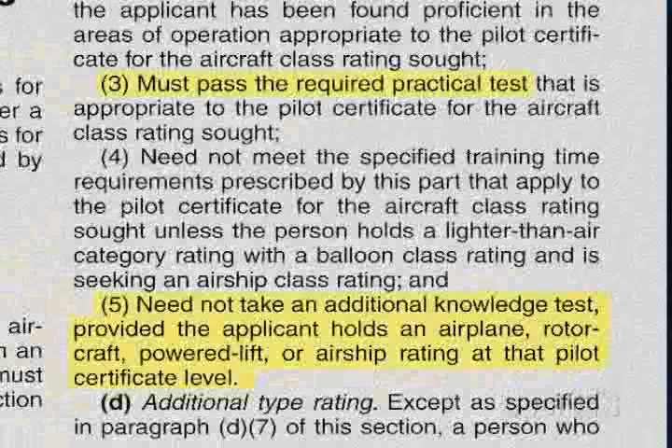The requirements for obtaining a multi-engine class rating are described in Part 61 of the Federal Aviation Regulations. If you are adding the rating at the same level as your existing single-engine pilot certificate, you must show proof of training and take a practical test. No knowledge test or minimum flight times are required, provided that you already hold an airplane category rating. If you don't hold an airplane category rating at the certificate level for which you are applying, you and your instructor will need to spend some time with the regulations to determine the requirements.

After obtaining an unrestricted multi-engine rating, you are legally permitted to fly any multi-engine airplane that does not require a type rating. Of course, you will also need complex and high-performance endorsements in your logbook when these are required. Remember, just because it is legal doesn't mean that it is prudent.

If you obtained your multi-engine rating in an airplane having the engines positioned to the front and rear of the fuselage, your certificate will be issued with a centerline thrust limitation. Removal of this limitation requires a second practical exam in an airplane with engines positioned away from the fuselage center.

Flying a multi-engine airplane can provide redundancy for critical systems. This provides the opportunity for safer operations when something breaks. The added complexity and additional systems also mean that the chances of something failing may be greater.

One thing that you will notice in your training is that things happen more quickly in a twin. When something does fail, you have to be on top of your game to improve your chances of a safe outcome. A pilot with a bit of rust on his skills can be much more dangerous in a multi-engine airplane than in a single. This rust factor is likely one of the primary reasons why flying light twins has not historically proven itself to be safer, even though the opportunity is there.

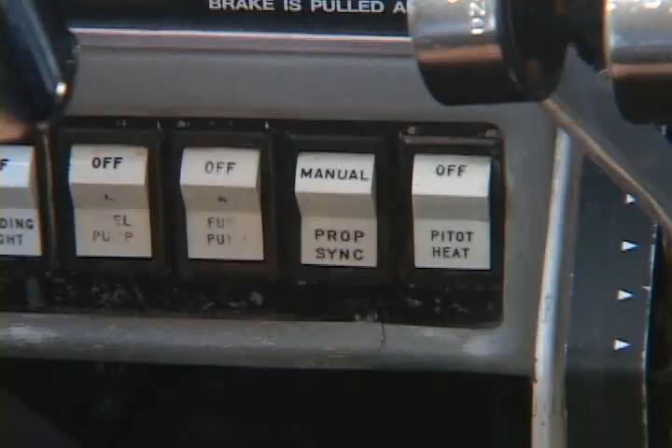This position is used when an engine fails and will be discussed in detail later in this program. Completely new systems may also be present. With two propellers spinning outside the cabin of your training aircraft, you'll want to have them rotating at the same speed. This is known as synchronizing the propellers. Syncing the props reduces their noise level and removes a pulsing sensation heard in the airplane. Your training aircraft may have a system for automatically synchronizing the propellers.

Another new system found on many light twins is a dedicated heater for the cabin. This type of heater burns gas from the tanks and provides heat through its own ductwork. This overcomes the difficulty of getting heat from the wing-mounted engines into the cabin for cold weather flying.

Take a look at the V-speeds for a multi-engine airplane, and you will see a number of familiar items. You'll also see some new speeds that you may not recognize. These speeds are related to multi-engine emergencies and operations with only one engine running. We will briefly define them here. Those important to light twins will be discussed in more detail later in the program.

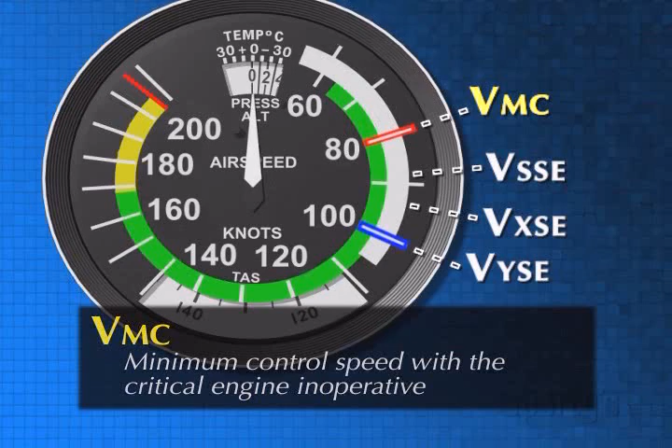VMC is defined as the minimum control speed with the critical engine inoperative. VSSE is the safe intentional one-engine inoperative speed. This is a speed that your instructor will use to keep your training safe. VYSE provides the best rate of climb speed on a single engine, while VXSE affords the best angle of climb in this condition.

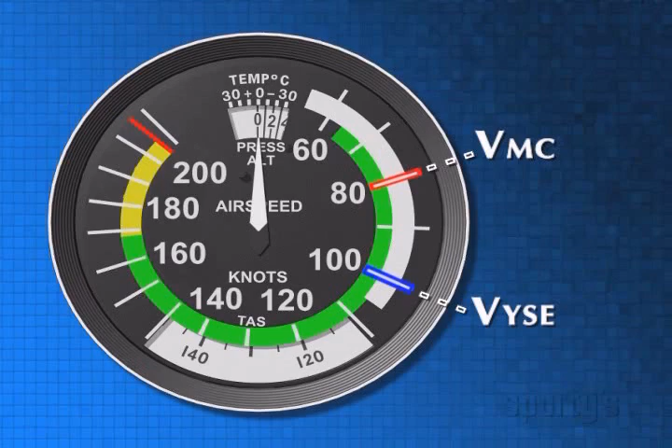Less common in light twins, but worth mentioning, are V1 and V2. V1 can be defined as the takeoff decision speed. It is the maximum speed in the takeoff at which a pilot may begin to stop the airplane and remain within the accelerate stop distance. It is also the minimum speed in the takeoff following a failure of the critical engine at which the pilot can continue the takeoff and achieve the required height above the takeoff surface within the takeoff distance.

V2 is defined as the takeoff safety speed. This is the speed that must be obtained after liftoff to meet the required engine-out climb performance. These speeds will be found in the airplane flight manual or pilot operating handbook for your airplane. If you are flying an older twin, it's possible that the manufacturer may not have published all of them.

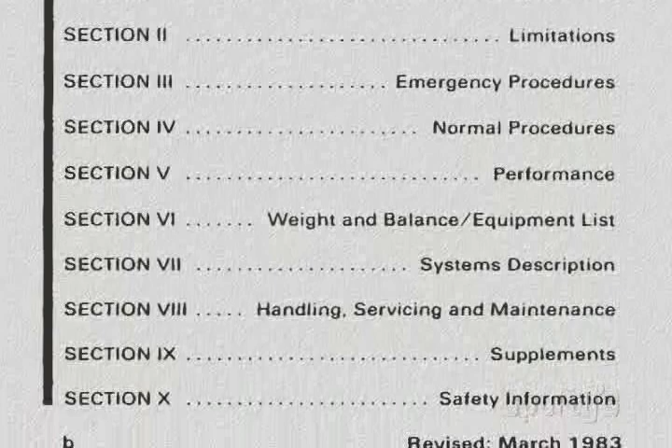The AFM or POH for your airplane will include the information that you have come to expect in an aircraft manual. It will also include a number of new performance charts which we will discuss later in the program.

The principles behind weight and balance calculations do not change with a multi-engine airplane. What does change is the number of variables. In your 4-seat single-engine trainer, your options for the carriage and placement of baggage were limited. In a typical twin, you will find more seats and more baggage compartments. You may have the choice of loading baggage into a nose compartment or a rear compartment or even into a wing locker. Each compartment will have its own limitations and affect the CG differently.

Your loading may not only be concerned with the traditional longitudinal CG, but the lateral CG as well. The manual for your airplane will provide you with the information you need to make appropriate loading decisions. Some manufacturers even include suggested loading for common scenarios. Regardless of the suggestions, the PIC is responsible for ensuring that the aircraft is loaded within acceptable limits.

This will become even more critical when we consider the effect of weight and balance on controllability and performance after an engine failure, later in the program.

You should find a checklist for the aircraft in the manual. This checklist, or a derivative created from it, will be used as we pre-flight the airplane. The inspection will be much like that for a complex single. There will, of course, be more engine and engine-related systems to check. Your instructor will point out the key items required during the pre-flight of your particular make and model of airplane.

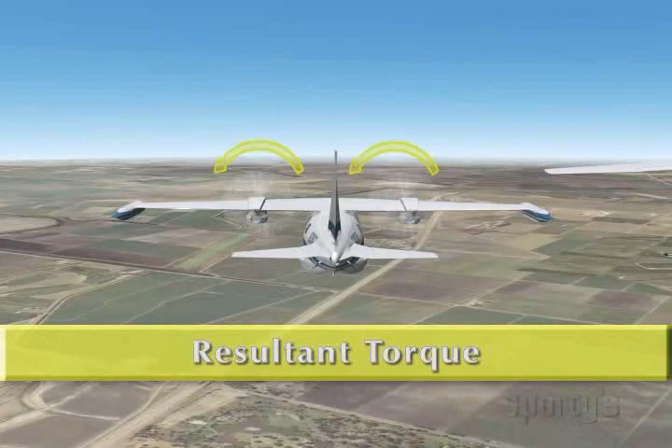Differences occur due to the position of the engines. Other airplanes have the engines turning in opposite directions from each other. These airplanes are commonly described as having counter-rotating propellers.

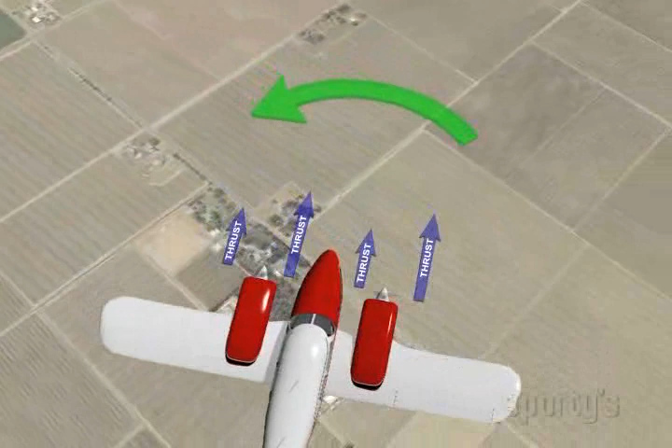When viewed from behind, the propellers on a traditional U.S.-manufactured twin both rotate clockwise. This places the descending blade on the right side of the engine. During flight at higher angles of attack, the descending blade has a higher angle of attack than the ascending blade. Because the descending blade of the right engine is further from the airplane's center of gravity than the descending blade of the left engine, a higher yawing moment is created on the right side of the airplane. This P-factor-induced moment will yaw the airplane to the left unless counteracted with rudder.

With counter-rotating propellers, the distance from the descending blade to the CG is equal on both sides. The yawing moments cancel each other out when both engines are producing the same power.

While we're speaking about aerodynamics, there are a couple of other items we should note. As you have probably surmised, a twin-engine airplane has four forces acting on it just like other airplanes. When both engines are operating, you have a comparatively large thrust vector, which is the sum of the two offset thrust vectors we have been discussing. This gives most light twins a significant climb advantage over their single-engine brethren when all is well.

A less intuitive difference in the four forces is the production of induced lift. Since the engines on most light twins are attached to the wings, there are localized areas of the wings receiving the accelerated slipstream of the propellers.

Let's get back to your first flight. After you've flown around for a bit and perhaps tried a few familiar maneuvers, you will return to the airport.

Descent planning in a multi-engine airplane requires a bit more thought than when flying a low and slow single. Cruise altitudes and speeds tend to be higher, and higher performance engines also require more TLC. Power reductions should be gradual whenever possible, and temperatures should be monitored and kept relatively stable.

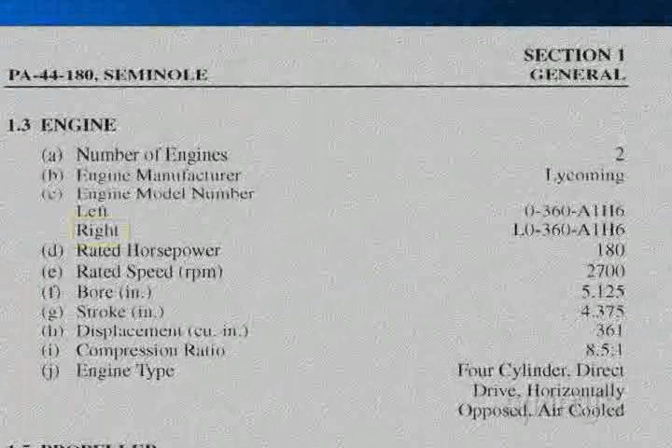The Duchess and the Seminole both have counter-rotating propellers. The O-360 engine on the right side of each airframe has its designation preceded by a letter L. This indicates a counter-clockwise or left-turning engine.

The diesel engines on the Twin Star are full authority digital engine control, or FADEC, equipped. This system controls the manifold pressure, propeller speed, and mixture through a separate engine control unit, or ECU, on each engine. As the pilot, you set the power desired as a load percentage, and the ECU makes the adjustments.

Each engine also has a backup ECU. If the system detects a fault, it will switch to the backup computer system and provide you with an alert. There is also a switch to make this exchange manually if the automatic system fails.

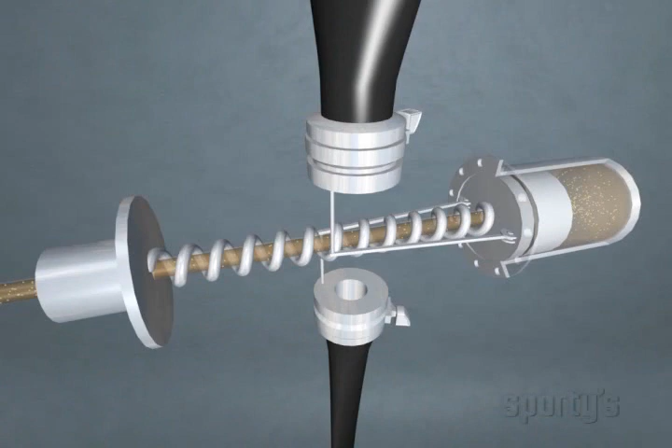The propeller systems on twin-engine airplanes are designed to feather, or streamline with the wind, when the engine needs to be secured in flight. Feathering occurs when oil pressure is removed from the propeller governor. The pressure is removed via a feathering valve using the propeller control, or may occur due to a loss of engine oil pressure. A combination of springs, counterweights, nitrogen pressure, or aerodynamic forces may be used to turn the blades to feather when the oil pressure is removed.

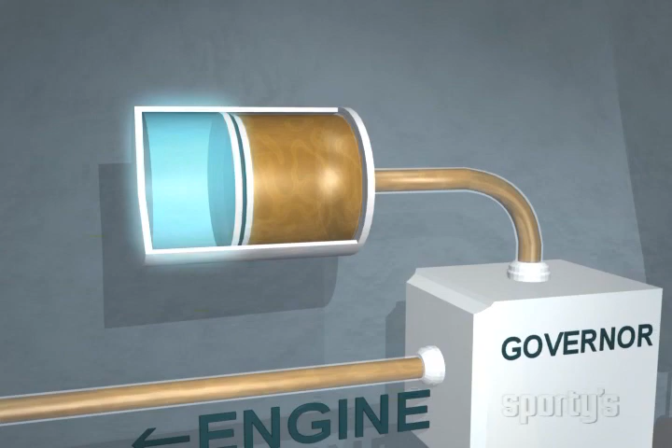The Seminole and 310 may be equipped with unfeathering accumulators. The accumulator will have two chambers with a piston or bladder in between. One chamber will be filled with a high-pressure nitrogen charge. The other chamber will hold the oil. When the engine is running, the governor will fill the oil side of the chamber with oil under high pressure. This causes the piston or bladder to move and compress the nitrogen.

When it comes time to unfeather the propeller in the training environment, the propeller control is moved forward out of the feather position. This releases the oil from the accumulator into the propeller system, where it pushes the blades out of feather. This makes restarting the engine easier because the forward motion of the airplane may allow a windmill restart or may assist the starter.

The diesel-powered Twin Star comes standard with accumulators. These are controlled by the FADEC system. When it comes time to restart an engine with a feathered propeller, you simply turn on the switch. The ECU unfeathers the propeller and the engine will restart via windmilling.

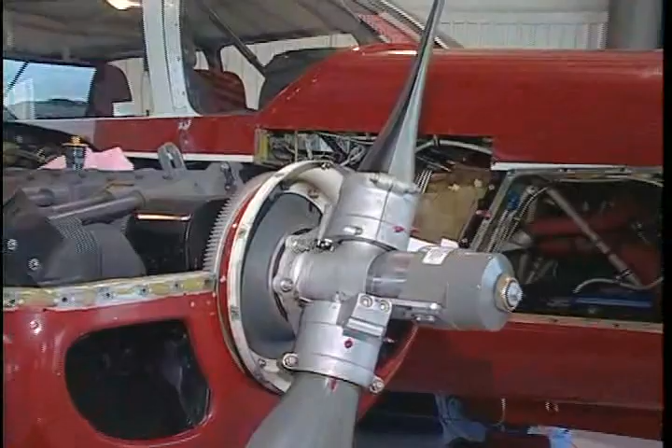There is a centrifugal locking mechanism installed within the propeller system to prevent feathering during normal shutdown. This mechanism uses a collar or pins which are disengaged by the rotation of the engine. When the locking mechanism is disengaged, the propeller may feather. As the engine slows to a normal idle speed, the mechanism will engage and prevent feathering during shutdown.

This is needed to prevent excessive loads on the starter and vibration on the engine during subsequent startup.

Normal operation of the propeller through the governor is controlled via a combination of flyweights, pilot valve, and speeder spring. These work to control the oil flow to a piston in the hub of the propeller. The operation is similar to that of a constant speed propeller on a complex single.

The big exception when comparing these systems is that most singles will go to a fine-pitched, low blade angle when oil pressure is removed. The flow of oil from an overspeed or underspeed condition is reversed in a twin as compared to a single.

The engines and propellers for most twins are controlled through individual mixture, propeller, and throttle controls. The standard order is for the throttles to be to the left, the propellers to be in the center, and the mixtures to be to the right.

The throttle and propeller controls are reversed on some older Beech aircraft. The Twin Star has only one power lever for each engine. The FADEC controls the manifold pressure, propeller, and mixture settings required.

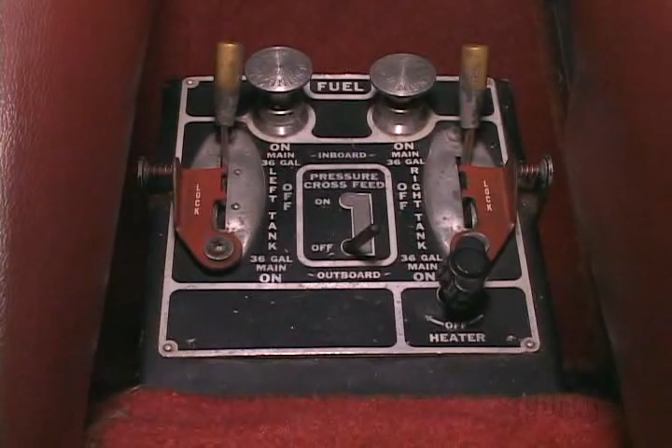Fuel in a multi-engine airplane is supplied to each engine from an independent fuel system. There will be some mechanism to get at least part of the fuel from one system to the opposite engine in an emergency. This is known as cross-feed operation. It's typically used to correct a fuel imbalance or for extended range when operating on only one engine.

The fuel system on the Aztec contains 4 main fuel tanks, 2 in each wing. Each fuel valve allows you to open the flow of fuel from one of the 2 tanks on that side. When changing between the inboard and outboard tanks, the valve goes through the off position.

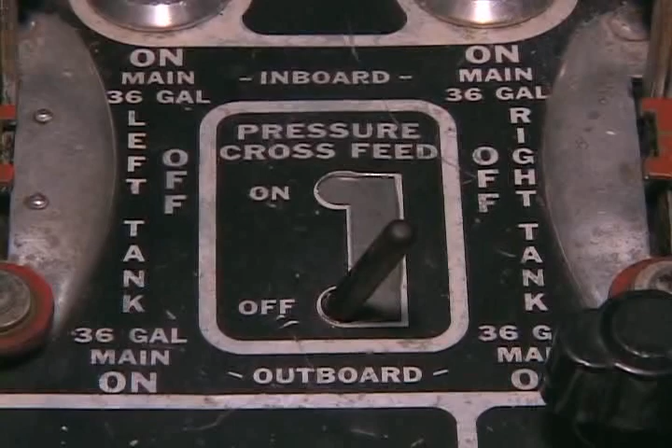The Aztec uses a separate pressure cross-feed valve to interconnect the 2 fuel systems. Either the engine-driven or the electric fuel pump from the fuel source side must be operating to get fuel to the opposite engine.

The fuel system on the Cessna 310 can contain up to 6 tanks: 2 main tanks, 2 optional auxiliary tanks, and 2 optional wing locker tanks.

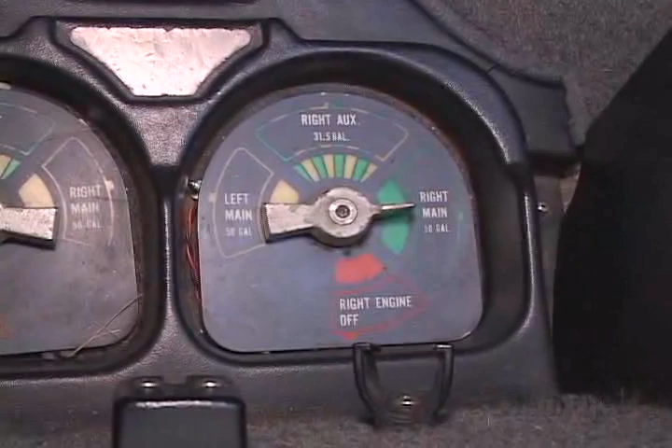The fuel selector allows you to select the fuel source for a particular engine. The choices include the main and the auxiliary tanks for that same side and cross-feeding from the opposite main tank. There is not an option to cross-feed from the opposite auxiliary tank.

Many of the maneuvers you'll perform during your training will be the same as or similar to those performed for your single engine rating. Others will be completely different. In this segment, we'll cover the differences in the common maneuvers and the new maneuvers under VFR.

In addition to the normal and crosswind takeoffs, climbs, approaches, and landings that we discussed earlier, you will also be required to perform short field variations of these.

For the short field takeoff and climb, set the manufacturer's recommendation for flaps prior to entering the runway. Position yourself for maximum runway use. After completing your lineup check at moderate power, continue to hold the brakes and apply the recommended takeoff power setting.

Give the engine instruments another quick scan and release the brakes. Accelerate to your rotation speed and establish a pitch attitude for accelerating to and climbing out at VX. Confirm a positive rate of climb and raise your landing gear at the appropriate time. Once clear of obstacles, lower the nose and establish a normal climb attitude.

For the short field approach and landing, a power-on, stabilized approach is important. Select your desired touchdown point and complete the traffic pattern and before landing checks as you would for a normal landing. Stabilize your aircraft on final at the recommended approach speed and angle.

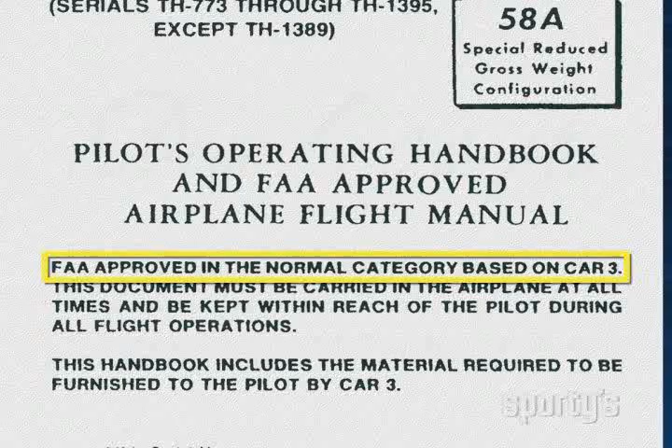New airplanes that are to be certified as normal, utility, acrobatic, or commuter category are certified under FAR Part 23. Many airplanes flying and being produced today were certified under its predecessor, CAR 3. During certification, a minimum controllable airspeed, or VMC, was established by the manufacturer.

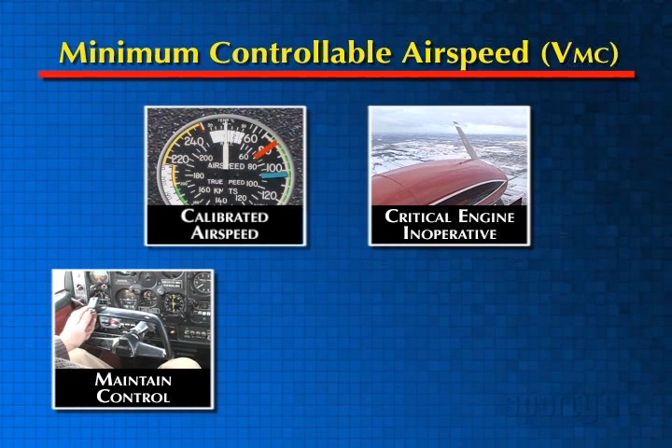This value is marked by the low-speed red radial on the airspeed indicator. VMC is defined by the regulations as the calibrated airspeed at which, when the critical engine is suddenly made inoperative, it is possible to maintain control of the airplane with that engine still inoperative and thereafter maintain straight flight at the same speed with an angle of bank of not more than 5 degrees.

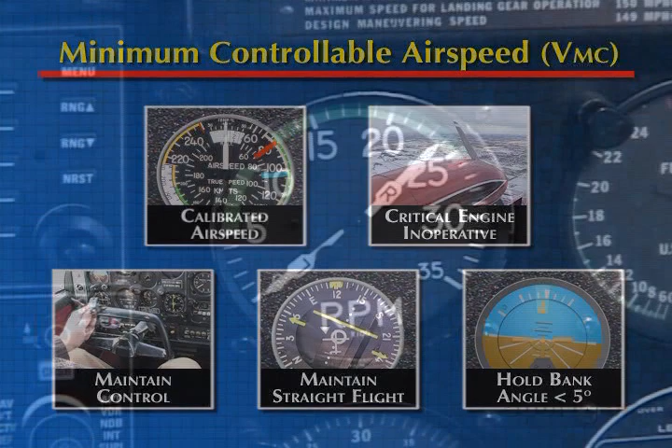The method used to simulate critical engine failure must represent the most critical mode of power plant failure expected in service with respect to controllability. It was established using specific criteria which should represent a near worst-case scenario for controllability, assuming proper pilot technique. The critical engine mentioned in the definition is the engine whose failure would most adversely affect the performance or handling qualities of the aircraft.

An engine might be considered critical due to its direction of rotation, or it could be related to important systems on only one engine that increase the pilot's workload when unavailable. Light twins are considered to be those having a maximum gross weight of 6,000 pounds or less.

Light twins that stall at 61 knots or less in the landing configuration must meet the following criteria for the establishment of the low-speed red radial. First, the criteria noted in the definition apply. Additionally, VMC must have been determined with the most unfavorable weight and center of gravity position.

The airplane must have been airborne and out of ground effect. The airplane would have been configured for takeoff with maximum available takeoff power on each engine, flaps and trim set for takeoff, landing gear retracted, and all propeller controls in the recommended takeoff position throughout.

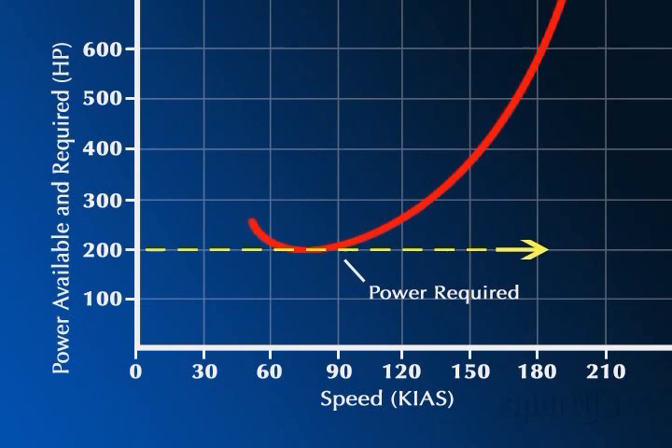As an example, let's assume that a particular airplane requires 200 horsepower to maintain level flight in a clean configuration with both engines running. The airplane has 2 250 horsepower engines producing a total of 500 horsepower. This provides an excess horsepower value of 300 horses.

If one of the engines fails, we are now producing only 250 horsepower, or 50% of the power. Our excess horsepower is now only 50. This is over an 83% decrease in excess horsepower. Climb performance will certainly suffer by more than 50%.

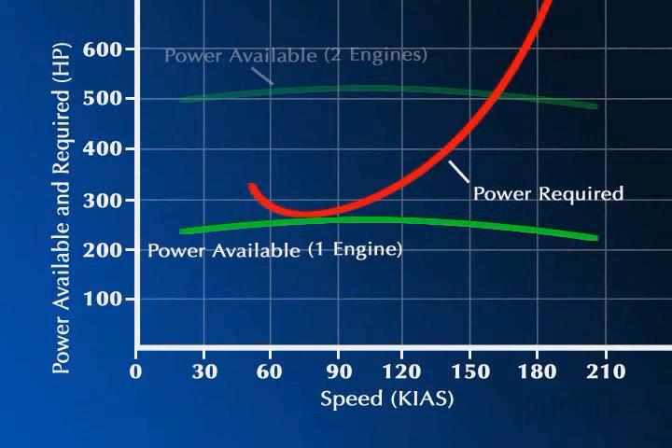So, does our climb performance decrease by 83%? Actually, it could be more. Our assumption was that the airplane requires 200 horsepower to maintain level flight in a clean configuration with both engines running. With only one engine running, additional drag and other factors extract a penalty on the horsepower required for level flight. In other words, we will require more than 200 horsepower to maintain level flight with only a single engine, thus further decreasing our excess horsepower.

In fact, it is possible that we will run out of excess horsepower and we will begin a descent.

Light twins that stall at 61 knots or less in the landing configuration are not required to be able to climb on one engine. For certification, the manufacturer simply needs to determine the climb or descent gradient at 5,000 feet with one engine inoperative. Heavier multi-engine aircraft, turbine-powered aircraft, and light twins with a stalling speed greater than 61 knots must be able to climb and have more stringent certification requirements.

The absolute and service ceilings on a single engine will be lower than with two engines operating. The definition for absolute ceiling does not change. It is the altitude where the climb rate reaches 0 feet per minute.

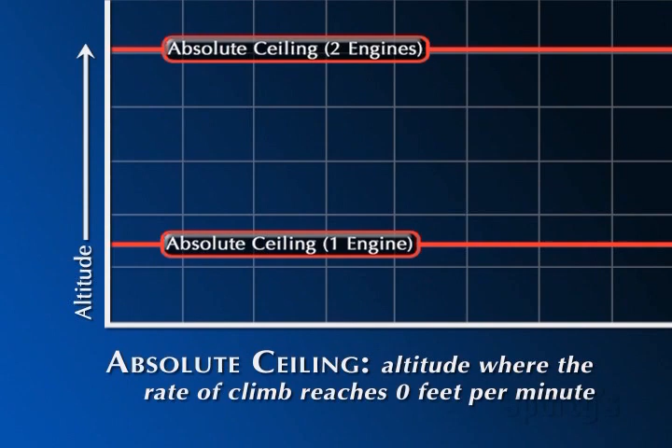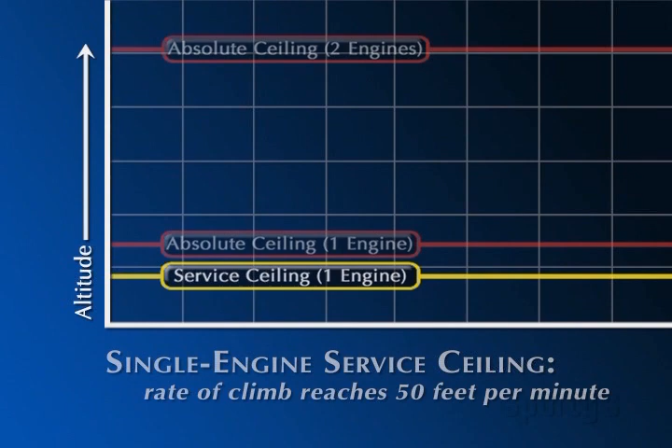The criteria for the service ceiling in a twin is different with one versus both engines running. The single-engine service ceiling is the altitude where the airplane can only climb at 50 feet per minute on one engine. The two-engine service ceiling is based on a climb rate of 100 feet per minute.

Controllability and performance are not independent of one another. Control and configuration inputs that have a positive effect on one may have a detrimental effect on the other. Let's take a look at a number of these factors and see what they do for each.

The left engine is considered to be the critical engine on traditional U.S.-style twins with both engines turning the same direction. This is due to the left turning tendencies already present with two engines in operation. The critical engine situation is exacerbated on some aircraft by the important system issue. An example found in older Piper Aztecs and Apaches is that the only engine-driven hydraulic pump is also on the left engine. Not only must you overcome the turning moment when the critical engine is out of action, but you must operate the manual hydraulic pump to raise or lower the landing gear and flaps.

Unless there is a system-related or other issue, aircraft with counter-rotating propellers are often considered to have no critical engine. This means that performance or handling qualities are affected the same regardless of the engine that fails. You might also say that both engines are just as critical.

The bank angle of the airplane influences both controllability and performance. By banking to raise the inoperative engine, you create a horizontal component of lift that decreases the need for rudder input. This enhances controllability, but at the cost of performance. While we could use bank angle to lower our VMC substantially, it may not be worth the price to performance.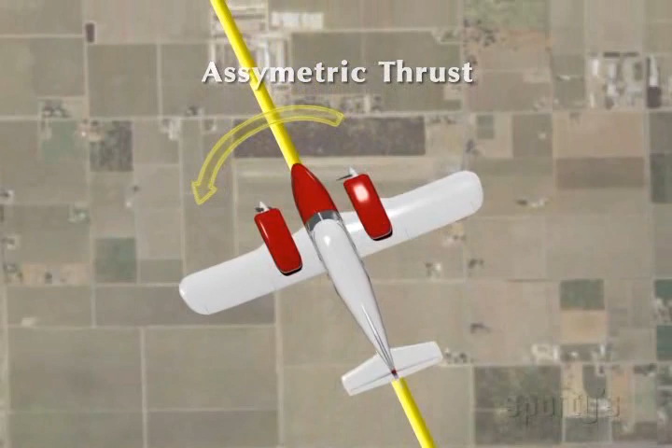One use of bank that is positive to both controllability and performance is setting zero side slip. If you keep the wings perfectly level and maintain directional control strictly with the rudder, the airplane will slide sideways through the air. The operating engine is trying to turn the airplane toward the inoperative one. You counteract this by applying rudder toward the operating engine, creating a force on the tail to push it toward the inoperative side. The combination of these forces creates a force vector which causes the airplane to slide somewhat toward the inoperative engine.

This can be demonstrated in flight by placing a yaw string at the center of the windscreen. As the airplane moves forward and slides sideways, it presents the side of the fuselage into the relative wind. This creates additional drag and decreases the airflow over the rudder as it gets masked by the vertical stabilizer. The additional drag decreases performance, and the decrease in flow over the rudder decreases controllability.

You can prevent the creation of this force vector by applying a slight bank toward the operating engine and releasing a bit of the rudder pressure. The horizontal lift component is used to counteract the sideward force vector. This allows the airplane to track straight through the air, increasing both performance and controllability.

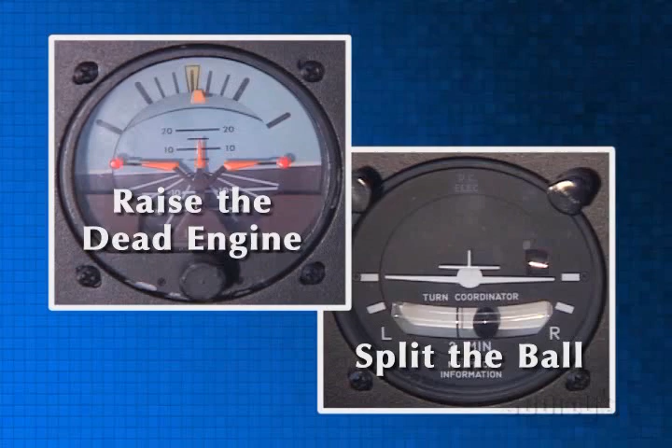The amount of bank required varies from one airplane to the next. Most light twins will require a bank of 2 to 3 degrees. The right amount of rudder pressure will put the ball of the inclinometer slightly out of its center position. You will want to center the ball with the index line that is toward the operating engine. An easy way to remember how to set zero side slip is to remind yourself to raise the dead engine and split the ball.

If you'd like to determine more precise zero side slip settings for your twin, fly with your instructor with a yaw string attached. The most unfavorable weight and center of gravity for control of most light twins are a low weight and an aft CG.

These were the criteria for establishment of VMC. These same criteria are the most favorable conditions for performance. A lower aircraft weight requires a smaller lift vector while in an unaccelerated climb. This will create a proportionately smaller horizontal component when established in a zero side slip. All other factors being equal, a heavier aircraft will have a slightly lower actual VMC.

The further aft the CG, the less controllable the airplane is during an asymmetric situation. This is due to the leverage of the rudder. When the CG is in the forward part of the envelope, the distance between the CG and the rudder is greater, and the rudder has a longer leverage arm. With the CG near the rear of the envelope, the leverage arm is shorter. For the same amount of rudder force, the yawing moment is less.

The performance of the aircraft is more concerned with the distance from the CG to the elevator. This relationship has to do with the tail downforce required while in flight.

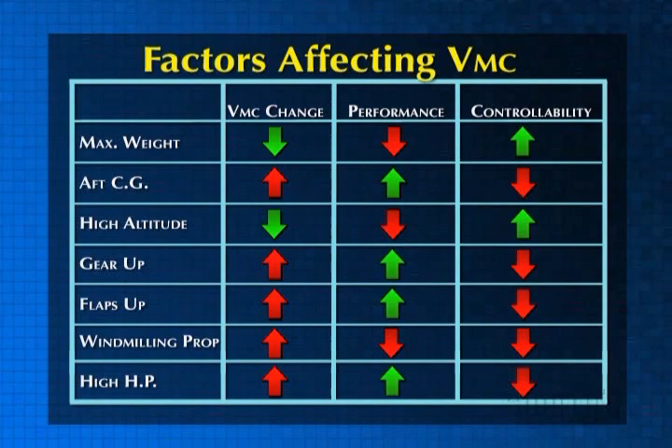That's a lot of information. This chart provides a comparison of the effects of various conditions we've discussed for your review. It's a bit easier to review in tabular format.

Now that you understand the principles of flying on one engine, let's go out and practice a few maneuvers where these principles must be applied. As with other maneuvers, you should prepare with a pre-maneuver checklist and clearing turns where appropriate. Altitudes for most of these maneuvers should be such that you won't descend below 3,000 feet AGL.

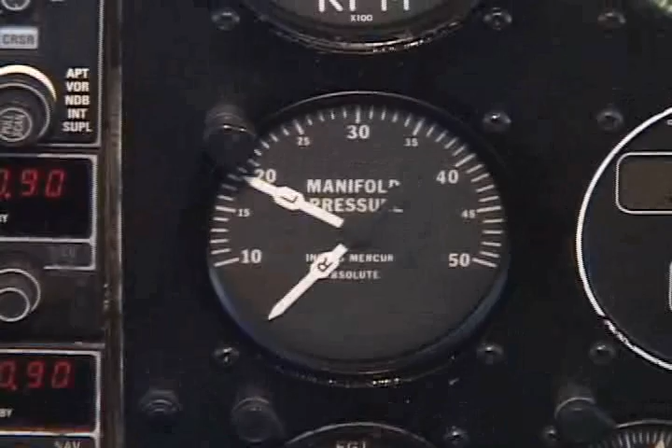Most instructors will give you an opportunity to fly the aircraft on one engine prior to throwing you into single-engine emergency procedures. Your introduction to asymmetric thrust may be simulated by reducing the throttle on one engine, or you may do a controlled shutdown and securing of an engine in flight. Feathering can be simulated on an operating engine by using the zero thrust setting recommended by the manufacturer.

Use the blue radial as your VYSE reference at this point. Set zero side slip for best efficiency. Utilize trim to reduce the control forces.

While flying on one engine, you will perform the four fundamentals: straight and level, turns, descents, and climbs if the airplane is able. The throttle on the operating engine will be adjusted as required for the maneuver. Turns will be performed in both directions.

For these, you have to maintain sufficient airspeed, and remember that the airplane will want to roll more quickly toward the inoperative engine. Don't allow this to happen. Stay in control of the flight. After sufficient practice, you will resume two-engine flight.

The secured engine recovery begins with the manufacturer's recommended restart procedure. If your airplane has a pressure accumulator, this greatly aids the process. Without an accumulator, you must start the engine in the feathered position. Once sufficient oil pressure builds up in the governor, it will take the propeller out of the feathered position.

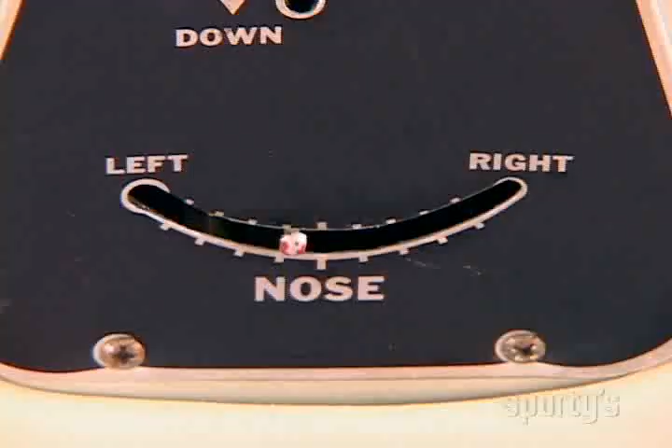The engine should be warmed up sufficiently before proceeding with the application of additional engine power. The primary flight controls and trim should be reset for two-engine flight.

The drag demonstration is not a required maneuver for the private or commercial multi-engine check ride. It is required for the flight instructor rating. Your instructor may show you this demonstration regardless of your rating level. The objective of the drag demo is to show you the effect of various configurations on the climb characteristics of the airplane. The VMC demonstration, or loss of directional control demonstration as it is sometimes called, will have you take the airplane to its lower limit of controllability on one engine and recover.

This maneuver requires some forethought with regard to the altitude to be used during the maneuver. First, we will want to be at least 3,000 feet above the ground. This does not mean that higher is necessarily better.

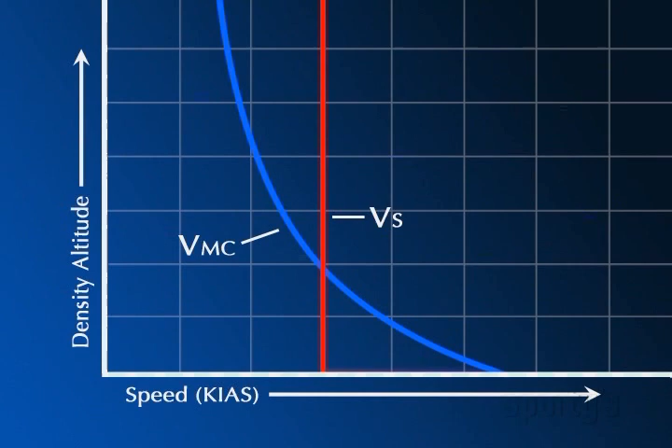Recall our discussion that actual VMC gets lower as our altitude increases, due to decreased power on the operating engine. Our stall speed, on the other hand, remains relatively constant. Most light twins start with a VMC speed that is higher than the stall speed. As altitude increases and VMC decreases, it approaches the stall speed. Above a certain altitude, actual VMC will be less than the stall speed.

If the airplane were to be slowed above this altitude to attempt to reach the actual VMC, a stall would occur first. A stall with an asymmetric thrust condition would result in a spin. There is no guarantee that this spin would be recoverable. The key is to prevent the stall and avoid the conditions necessary for a spin.

That being said, you must recover from the VMC demonstration at the first indication of loss of directional control, the first buffet, or the first sign of stall - whichever comes first, recover. To begin the maneuver, slow the airplane to 10 knots over VYSE.

Ensure that the landing gear is retracted. The flaps, cowl flaps, and trim are set for takeoff, the mixtures are set as required, and the propellers are set for high RPM. Maintain airspeed while reducing the power on the critical engine to idle and increasing the power on the operating engine to takeoff or maximum available power.

Establish a zero side slip condition. Slowly apply back pressure to begin reducing airspeed at the rate of 1 knot per second. Maintain directional control with the rudder. At the first sign of loss of directional control, stall warning, or buffet, recover.

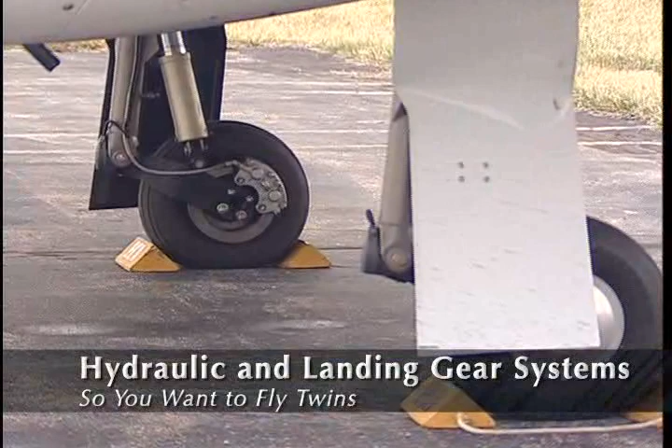All light twins use hydraulic pressure for activating their wheel brakes. The hydraulic brake system is normally independent of any hydraulic system used to raise or lower the landing gear. The Aztec, Seminole, Duchess, and Twin Star utilize hydraulic pressure for raising and lowering their landing gear. Of these, the Aztec uses a mechanical hydraulic pump and the others use an electric hydraulic pump. The primary hydraulic pump for most Aztecs is located on the left engine. It pumps hydraulic fluid freely about the system when the left engine is running.

To raise the gear, you move the mechanical thumb latch and raise the gear handle. The handle is attached to a valve which redirects the flow of the hydraulic fluid to the upside of the gear actuators and releases the pressurized fluid from the downside. When the gear reaches the up position, pressure builds up in the actuators to hold the gear up. When the pressure reaches a certain level, it forces the gear handle valve back to its neutral position, trapping the pressure in the upside of the actuators.

Lowering the gear releases and traps fluid in the opposite sides of the actuators. The Aztec also uses its hydraulic system for raising and lowering its flaps.

Electro-hydraulic landing gear systems may utilize different methods of raising and lowering the landing gear. The Twin Star uses a one-way electric hydraulic pump and a series of electrical valves to direct the fluid in the proper direction. When the gear lever is moved, it actuates the appropriate valves, and a pressure drop turns on the hydraulic pump. When the gear reaches its fully extended or retracted position, limit switches stop the operation.

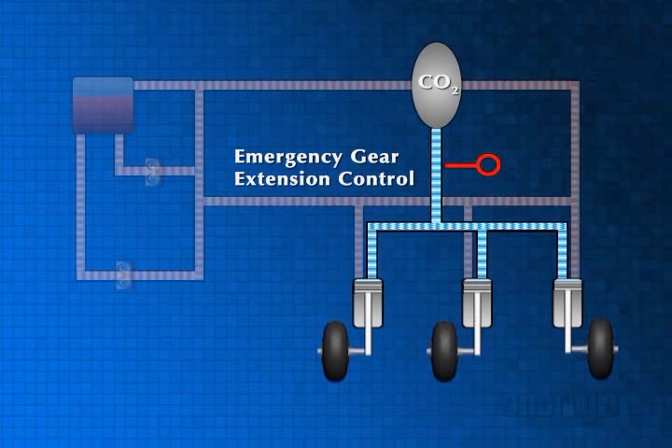A last resort method of emergency gear extension is also available on the Aztec. This system utilizes compressed carbon dioxide, which can be directed into the down actuators in the event that hydraulic fluid is lost. This is a one-time use system and can only be used to lower the landing gear.

The Seminole, Duchess, and Twin Star all use a free-fall system to lower the gear in an emergency. A valve or lever in the cabin is used to release the hydraulic pressure holding the gear in the up position. The gear falls or is assisted by springs into the down and locked position.

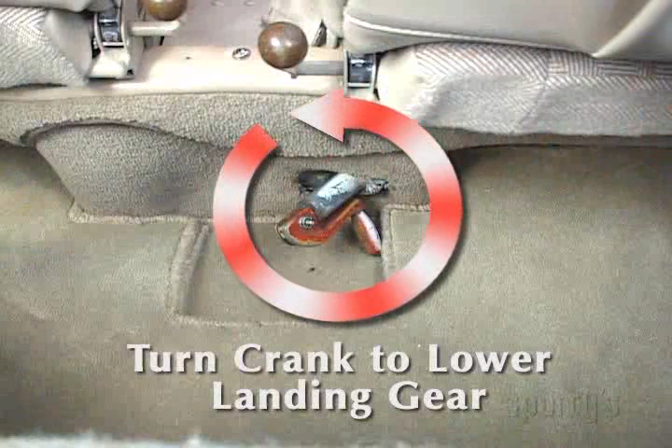The Baron and the 310 both have hand cranks for use in lowering the landing gear. Human power takes the place of electrical power in turning the gearbox to lower the gear.

Before we talk about what to do when an engine quits unexpectedly, let's take a look at some of the performance calculations you'll need to do before each flight in a multi-engine airplane.

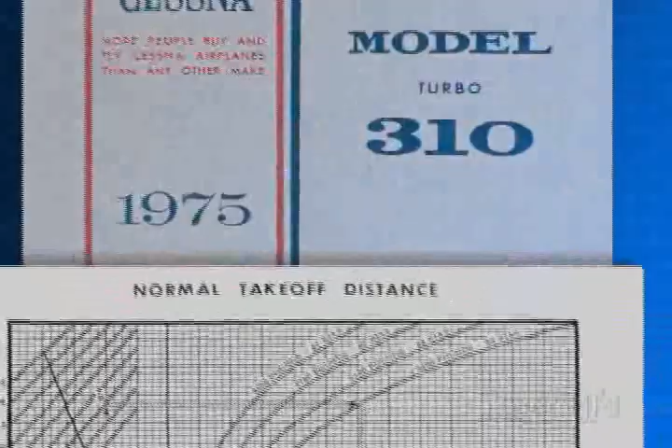Looking through the POH for your airplane, you will see a number of familiar performance charts. There will be graphs, charts, or tables for takeoff and landing distances, normal climb performance, performance in normal cruise, range, and endurance, and others that you've seen before. We won't spend any time on these here, but you should use many of them during your training.

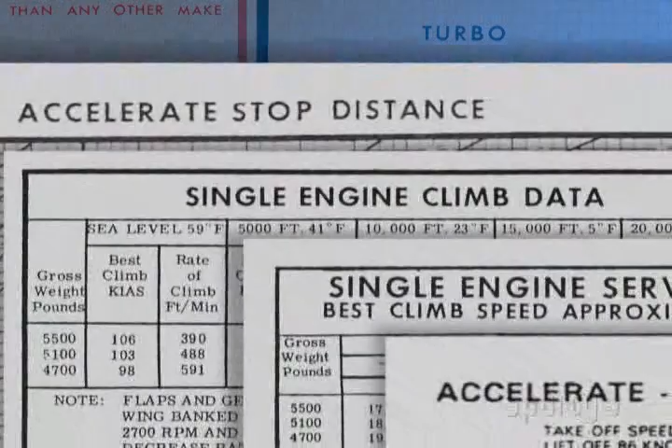You should also see some new charts. Accelerate stop is common, as is single engine rate of climb. You may find a chart for single engine service ceiling, accelerate go, or best single engine climb speed.

These new charts are the ones we'll be looking at over the next few minutes. Like all airplane performance data, these charts were developed with a very experienced test pilot at the controls of a brand new airplane. Keep this in mind as you go through the planning process. Be conservative in your decision-making.

The accelerate stop distance is the distance required to accelerate from 0 knots up to a specified speed. The takeoff is then aborted and the aircraft is brought to a stop. The chart will specify the speed and the conditions upon which it is based. It is often assumed that an engine failure is the reason for the abort. Some charts do specify this, others do not. Know the conditions for your airplane and don't assume something that isn't stated.

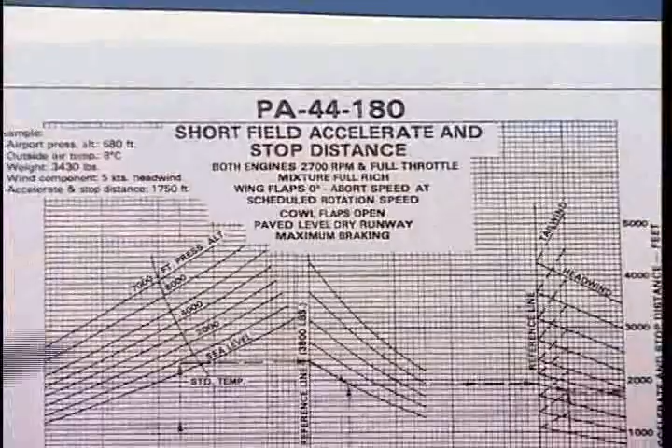Takeoffs may be aborted for other reasons, and the distance has value in these situations as well. While not required for FAR Part 91 operations, it's a good idea to use the calculated accelerate stop distance as your minimum runway length requirement. The conservative pilot will add a buffer to the accelerate stop distance when determining if the runway is sufficient.

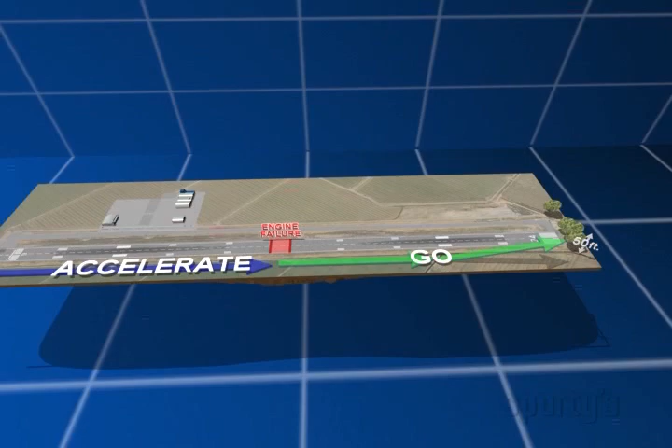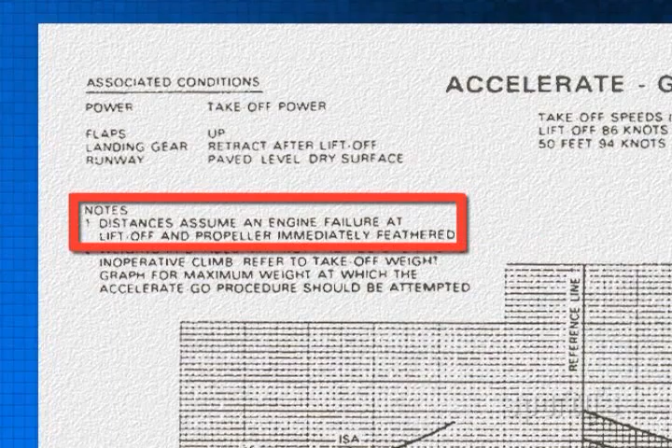The accelerate go distance starts out the same as accelerate stop. The aircraft starts out at 0 and accelerates to a specified speed. At the specified speed, known as VEF, an engine is assumed to fail and the takeoff is continued. The accelerate go distance is the distance from the start of the takeoff roll until climbing over 50 feet above the ground. In many of the light twins with an accelerate go chart, VEF is assumed to be the liftoff speed. If the manufacturer of your airplane did not include an accelerate go chart, there's probably a reason why.

Do not plan to continue a takeoff after an engine failure without this information, unless sufficient speed and altitude have been obtained. Determining your single engine rate of climb is very important for multi-engine flying.

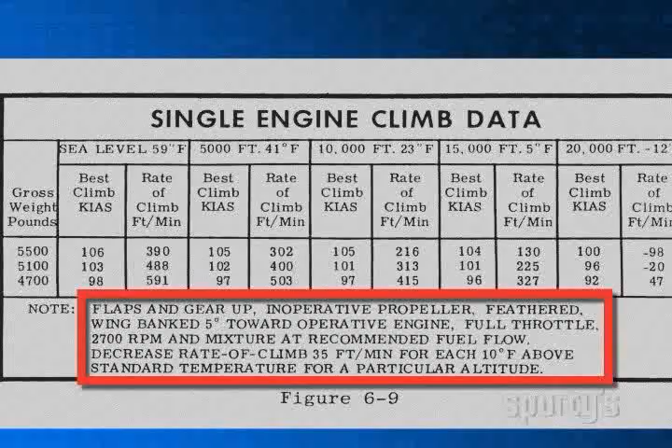Many of the decisions regarding your flight will be based upon this information. As with all charts, verify the conditions specified for this rate of climb. If the chart indicates that this climb rate is with the gear and flaps up and the propeller feathered, you won't get the calculated rate in any other configuration. Some manufacturers will list the climb penalties for variations from the stated conditions. Remember, even with the gear and flaps up and the inoperative engine's propeller feathered, your calculation may show a descent.

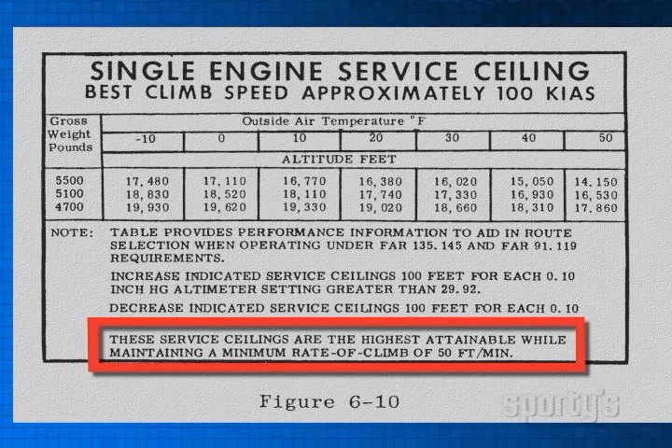As previously described, your single-engine service ceiling is the altitude where the airplane's rate of climb will slow to 50 feet per minute. Some manufacturers include a chart for this ceiling. If one is not included, you can work backward using the single-engine rate of climb chart, starting with a 50-foot rate of climb and working back to the altitude where this will be obtained.

It's important to know these altitudes when planning a flight in a multi-engine airplane. In the event of an engine failure while cruising at a higher altitude, your airplane will begin to descend. If your technique is perfect and the airplane is otherwise operating perfectly, you will drift down to the absolute ceiling. If everything is not perfect, the service ceiling may be a better altitude to use for planning.

What kind of planning do you need which requires this number? Well, for one thing, you will need to compare this number to the terrain that you'll be flying over. If the terrain is higher than your single-engine service ceiling, you need to plan for alternatives along your route.

Determine what airports you can reach during your single-engine descent. Find out if there is suitable lower terrain near your route which you can reach. If an engine failure will leave you without alternatives, consider if there is another route to your destination that has more options.

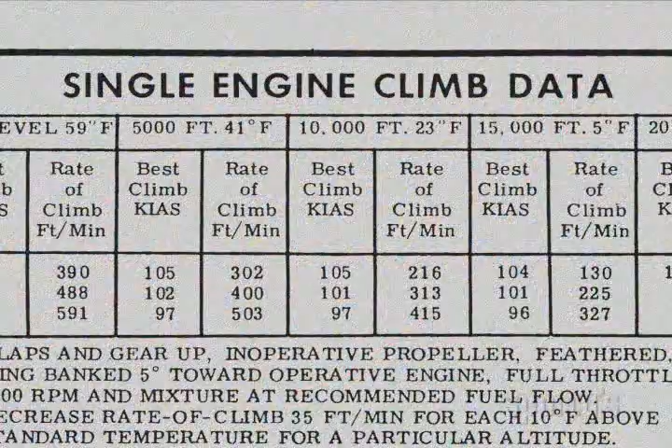The best single-engine rate of climb speed varies based upon weight and density altitude. Some manufacturers provide a chart or table to calculate the correct value.

Other manufacturers only give the blue line value of VYSE. Planning for emergencies should begin on the ground.

Like in all flying, you should continue to reevaluate your emergency plan until you are safely on the ground and secured. As previously mentioned, every takeoff should be preceded by a takeoff briefing. During this briefing, you are telling yourself and your instructor what decisions you have made about the takeoff. This briefing is a statement of your emergency plan so that it can be put quickly into action if needed. The decisions you make may be critical to a successful outcome in the event of an emergency.

The information presented here is a potential thought process for a light twin. It is not definitive. Your airplane and the conditions may warrant different decisions. A before takeoff briefing might sound something like this.

This morning we'll be doing a normal takeoff on runway 4 with a static run-up prior to brake release. We'll rotate at 85 and climb out at 120. Please monitor the engine gauges and speed throughout the takeoff and call out any abnormalities you see. In the event of an engine failure or other abnormality prior to rotation, we'll abort the takeoff.

If we have an engine failure after takeoff and prior to gear retraction, we'll land straight ahead on the remaining runway. If we have an engine failure after gear retraction, we'll continue the takeoff straight ahead and enter a left-hand traffic pattern for a landing back on runway 4. Our departure will be straight out until we're 500 feet above the pattern, and then we'll make a right turn on course up to 6,000 feet. Any questions?

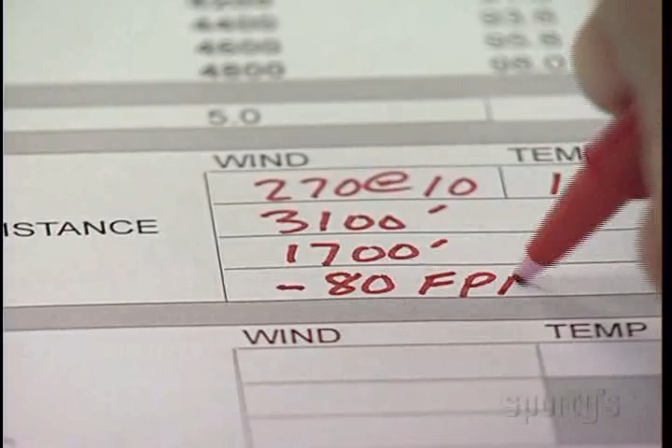If there are obstacles, and you are still below them, you will have to decide if a climb at VXSE will allow you to climb over them. Your single-engine rate of climb calculations and experience as a multi-engine pilot will play a part in determining the best case for you during this phase of the takeoff. If your calculations tell you that the airplane won't climb even when cleaned up, your best option will be planning for an immediate landing.

After accelerating past VYSE and climbing above any obstacles, you will likely be beyond any landable runway. You should have a positive rate of climb, and your gear should be transiting up. Your plan for an engine failure at this point will be primarily dependent on your calculated performance of the aircraft. If you anticipate a reasonable climb on one engine, you would likely plan to follow the emergency procedures while continuing to climb. It is very similar to the engine failure procedure in cruise flight, except that we will go more quickly to securing the engine.

As with cruise flight, fly the airplane first. Maintain directional and roll control while pitching for VYSE. Realize that VYSE on a single engine may be a lower pitch attitude than a two-engine climb at VY. Apply full power by pushing both sets of mixture, prop, and throttle controls full forward. Minimize the drag, ensuring that the flaps are up and the landing gear is up.

Identify and verify the failed engine. Follow up the engine verification with feathering the propeller on the inoperative engine. Raise the dead engine slightly and set zero side slip. If performance and altitude permit, review the emergency checklist to ensure completion of appropriate items.

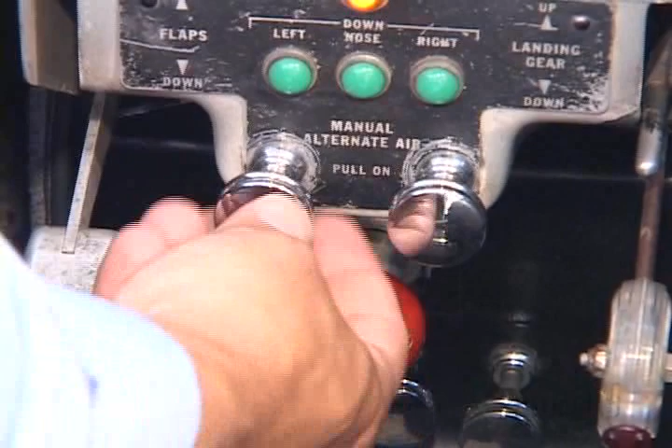The next item to evaluate is the air supply to the engines. Open any available alternate air door or turn on the carburetor heat. If none of this works to restore engine power, it is time to secure the engine.

Ensure that the verified throttle is in its idle position. Check the RPM on the windmilling engine to ensure that it is high enough to feather the propeller. If the RPM is too low, you may need to increase the airspeed slightly if altitude permits. Grasp the propeller control for the inoperative engine and confirm that you have the correct control with a verbal feather left or feather right. Pull it smoothly into the feather position. Ensure that the propeller on the correct engine feathers.

Do the following for the inoperative engine. Pull its mixture control to idle cutoff. Shut off the fuel pumps and valves for that side. Turn off its magnetos.

If the master switch allows separate control, turn off the alternator for that side. Close its cowl flaps, declare an emergency, and turn toward a suitable airport. Adjust the power and cowl flaps on the operating engine to ensure its longevity.

If your engine has a max continuous power setting, you may need to reduce power to this setting. Ensure that fuel will continue to flow to the operating engine. If the engine was secured due to an actual failure, attempting a restart is strongly discouraged. Accidents have occurred during attempted restarts with defective engines. Once you've made the decision to secure, stick with it.

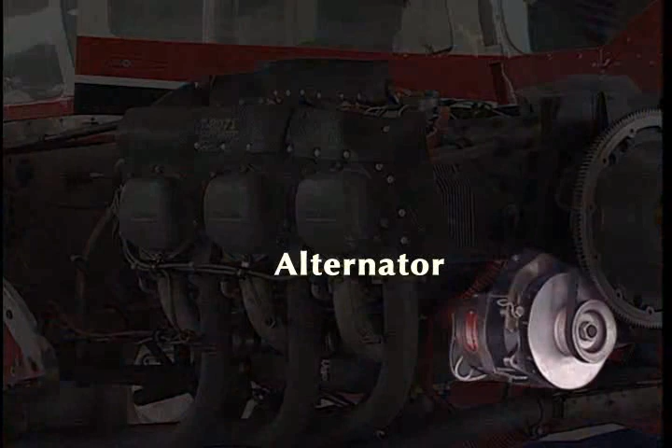Multi-engine electrical systems come in 14 and 28-volt varieties with 12 or 24-volt batteries. The systems tend to have an alternator or generator on each engine with a single battery. Most electrical systems provide for load balancing between the two generation devices, typically through a connection between two individual voltage regulators. The system should prevent a single alternator or generator from being required to carry the entire load, which can lead to longer component life. It should also allow one alternator or generator to pick up the full load if the other unit fails.

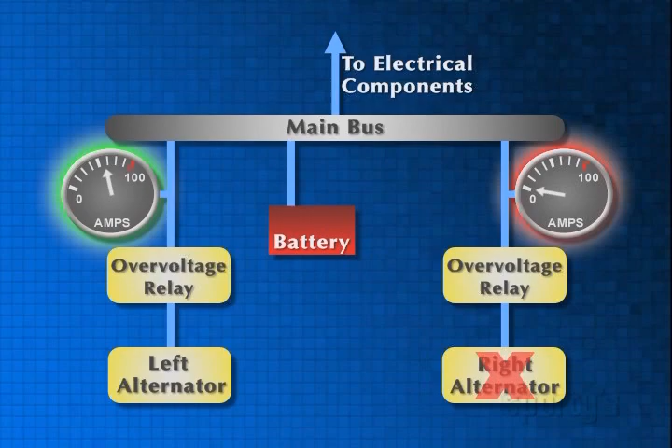If a charging unit fails, you may be required to decrease the electrical load on the system to prevent damage to the operating unit. A method for re-exciting an alternator field circuit should be available if a transient overvoltage spike takes the unit offline. This may be a matter of turning off the affected alternator's switch, resetting any breakers, and turning the switch back on. Some airplanes, like the 310, may have an emergency alternator field switch that allows a more direct connection between the battery and the alternator field circuit.

5 of the 6 light twins featured in this program use a gas-fired combustion heater in the nose to heat the cabin and provide windscreen defrost. The exception is the Twin Star, which uses heat from the right engine to warm the front seats and the floor, while heat from the left engine is used to defrost the canopy.

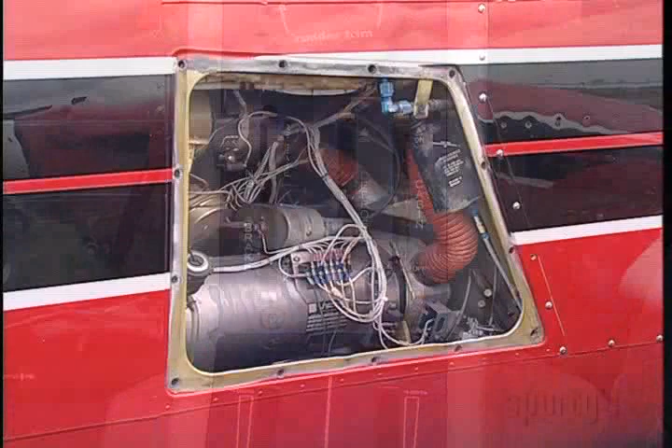The combustion heater in the other 5 models burns avgas from the fuel system. A series of blowers direct the heated air into the cabin and onto the windscreen. Controls within the cabin should be available to control the temperature of the air, and some type of fuel shutoff may also be available. Under certain conditions, it's possible for one of these combustion heaters to overheat. This should trip an overheat sensor within the unit and shut it down. Normally, this sensor cannot be reset in flight.

Pressurization may also be available when flying heavier twins. Pressurization systems do vary, so get a thorough checkout if your twin is so equipped. If the airplane is capable of pressurization and has been certified for operation at greater than 25,000 feet, you will need a high-altitude endorsement to act as pilot in command.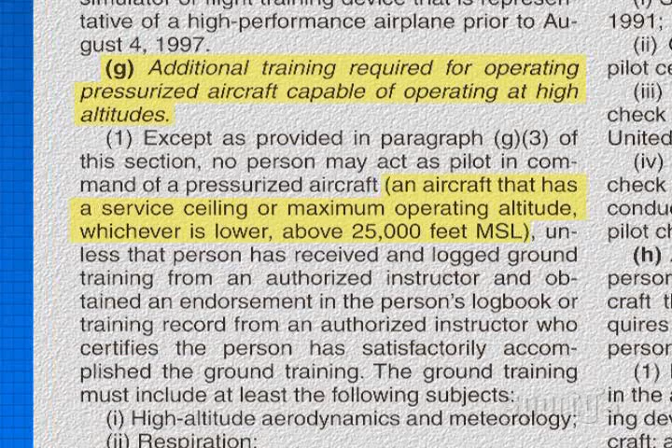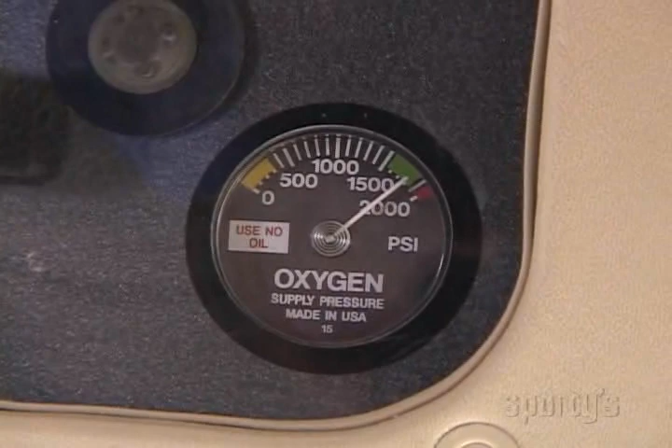More common on light twins is the availability of a supplemental oxygen system. The horsepower available with a multi-engine airplane makes getting up to oxygen-required altitudes a real possibility. If you plan to fly at these levels, know the oxygen requirements and capabilities of your system. Always keep grease away from oxygen fittings. Use caution when using oxygen while wearing petroleum-based skin products. Minimize ignition sources to the extent possible. Remember that oxygen does not burn, but it will intensify existing ignition sources and fires.

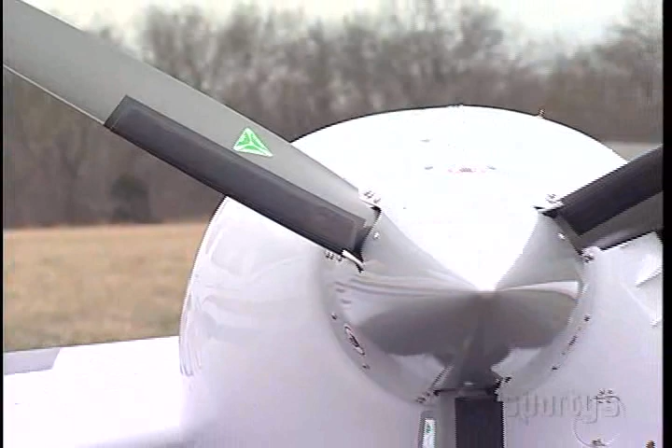A number of the example aircraft have been manufactured with anti-ice and optional de-ice equipment. The Baron, Aztec, and 310 could all have been delivered with wing and stabilizer pneumatic boots. The Twin Star is available with a glycol-based de-ice system. Heated, booted, and liquid-based de-ice for the propellers have been used. Windscreen protection appears as liquid-based and heated plate-based.

Just because your twin has some de-ice protection does not mean that it is certified for flight into known icing conditions. The pilot operating handbook assigned to the serial number of your airplane should define the capabilities and certification of the system. Even when certified for flight into known ice, there are icing conditions that may overwhelm the system. It's best to only use the available systems as a means to escape the icing conditions.

Something that you may find in your light twin is an onboard radar system. These were and are available as an option on a number of aircraft. If one is available in your aircraft, you'll want to learn about this valuable tool. Self-study with one of the radar-related books or programs available from Sporty's will help make your time with an instructor go much more quickly.

Other systems available for weather avoidance are readily available as aftermarket and factory-installed systems. Installed lightning detection has been around for some time. Newer systems may provide data from NexRad radar and ground-based lightning detection stations, current METARs and TAFs, and a whole host of other weather products via uplink from ground stations or satellite downlink.

These products are viewable in the cockpit through a multifunction display. One caveat with these systems is that they are not real-time. The inherent delay makes them inappropriate for threading through fast-moving weather systems. They should only be used for reviewing the big picture and staying out of the area.

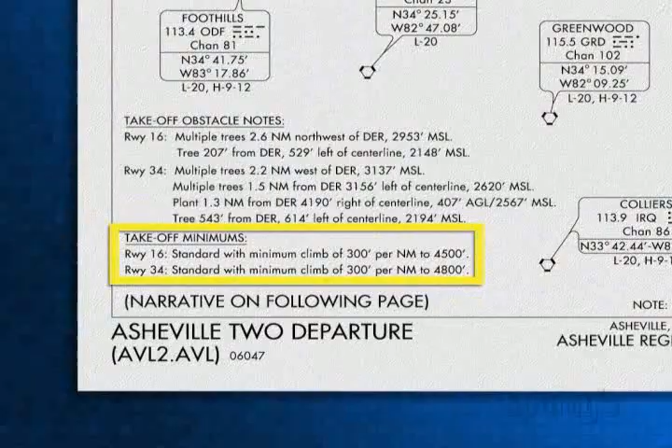Your departure planning under IFR should include a review of the required climb gradient of any departure procedures. Will the airplane be able to meet these gradients if one engine fails? What are your alternatives if the airplane cannot meet the climb requirement?

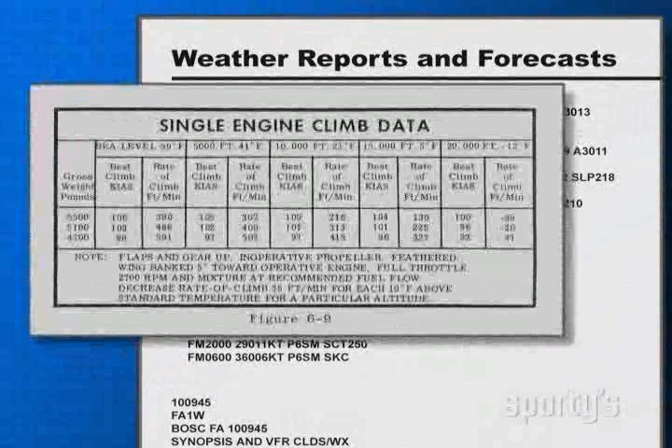The planning should also include a review of local instrument approaches. If an engine should fail, what are your best options? Considering the cloud heights, the visibility beneath the clouds, the anticipated performance of the airplane, the terrain around the airport, and other factors, what will be your best course of action if an engine fails prior to climbing into the clouds? If you can reach the minimum circling altitude for an approach at the departure airport with adequate performance prior to cloud entry, cautiously circling back to land may be a good plan.

Your decisions from this planning should be a part of your before takeoff briefing on an IFR flight. The en route portion of the flight may require fuel and engine management tasks along with the usual IFR requirements.

You generally will have time to plan for the arrival at your destination. You should develop a descent plan that will be the least stressful on the engines and passengers.

Many multi-engine airplanes have some type of autopilot installed. Yours may even have a flight director. If either of these is available, they can reduce the workload when used properly while flying single-pilot IFR. Learn how to use these tools in your airplane to assist in flying. Don't rely on them as a crutch. Failing to know the system's limitations, how the modes of the system operate, and how to interrupt power or disable the system can be dangerous.

An arrival briefing becomes more important under IFR conditions. As with the VFR briefing, include the anticipated runway and winds and your plans for an emergency. In addition, you'll want to set up and brief the approach to be flown. Briefing the approach can help to ensure that it goes smoothly.

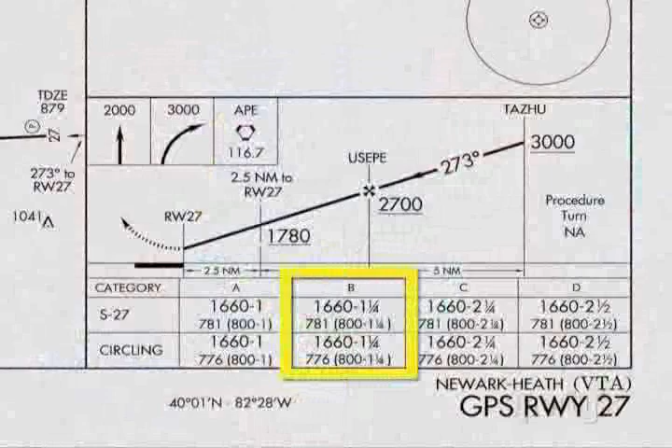Approaches in a multi-engine airplane may be done at higher approach speeds than you are used to seeing. This could mean that your approaches fall under a different approach category. Higher approach ground speeds will mean higher descent rate requirements during both precision and non-precision approaches. Your radio calls and fix crossing requirements remain the same as in other instrument flight.

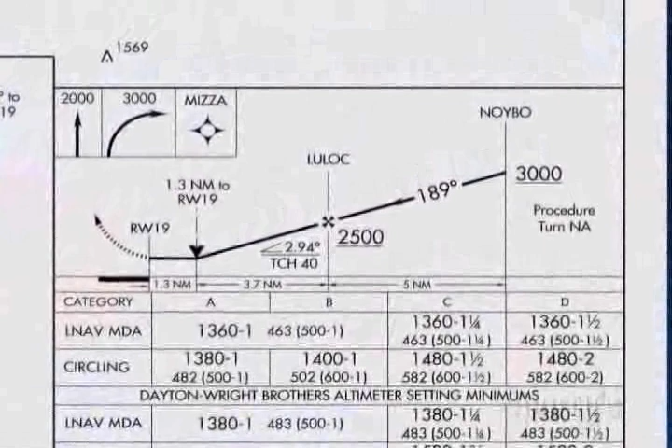As with all instrument flying, a stabilized approach profile is essential. When flying a non-precision approach, determine the descent rates that will be required for each segment, considering your higher ground speed. Establish your planned approach airspeed early enough to keep the approach stabilized. Utilize available drag devices and good planning during descents to minimize shock cooling of the engines.

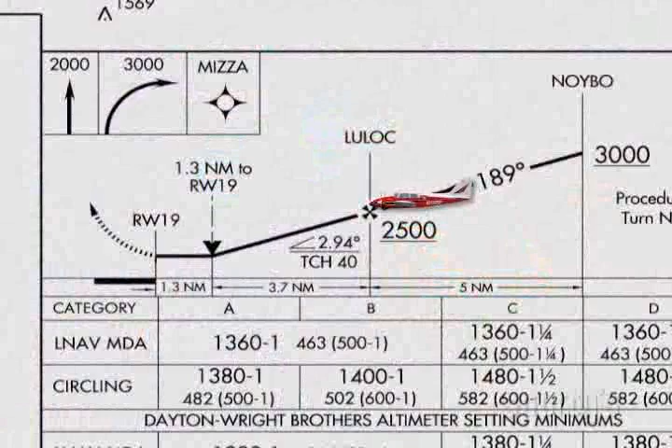Complete a before-landing checklist prior to reaching the final approach fix. The landing gear and approach flaps can be deferred until beginning the descent at the final fix. Final propeller and mixture settings might also be deferred until descent. After passing the fix, lower the gear and flaps as required, set the power, and begin the descent.

Upon arrival at the MDA, lead the power application for level off to compensate for the momentum of the airplane. Confirm that the landing gear is down and locked after level off. Having approximate power settings in mind for each segment and configuration will help. The runway environment must be spotted at a distance sufficient for landing without radical maneuvering. If the conditions for the approach are met, a descent to landing may be initiated.

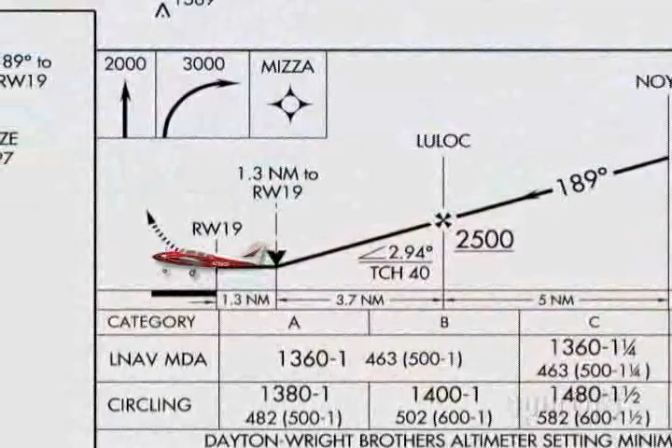During the descent, the airplane should be slowed to normal VREF and the flaps should be configured as required for landing. Execute an appropriate landing for the runway. If the runway environment is not seen in time or the conditions for the approach are not met, a missed approach will need to be executed.

Apply appropriate climb power and pitch settings and raise the flaps as required. Confirm a positive rate of climb and raise the landing gear. Execute the missed approach instructions. Adjust the cowl flaps as required.

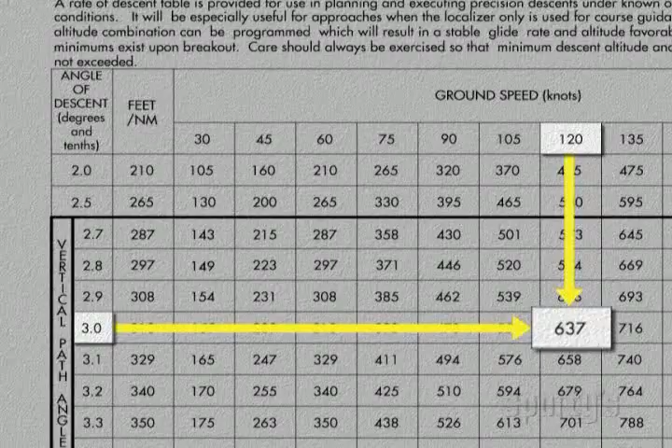The precision and LPV approaches should also be flown as stabilized approaches. Planning for the approach should include an anticipated vertical speed to maintain the glide slope at the expected ground speed. The airplane should be slowed to the approach airspeed, and the before landing checklist should be completed with the usual deferrals before intercepting the glide slope.

When the airplane is one dot below the glide slope needle centering, the landing gear and approach flaps should be lowered and the power set for the descent. Intercept and follow the glide slope. Upon reaching the decision altitude, complete the landing if conditions permit or execute the missed approach.

If landing, check the gear one last time as you slow to VREF and set the flaps as appropriate. Maintain the visual glide slope during this transition.

We've looked at engine failure training and emergencies in VFR conditions, and looked at flying a multi-engine airplane under IFR. Now let's take a look at what you'll need to know when an engine quits while flying IFR.

In actual IMC, or while training under the hood, your only references for maintaining control of the airplane are the instruments. When an engine quits, you need to quickly and accurately interpret the instruments to determine the appropriate actions.

As always, your attitude indicator will give you an indication as to the aircraft's attitude to the horizon. Use it initially to keep the wings level and pitch set as appropriate.

Your heading indicator will tell you that yaw is occurring and that the heading of the aircraft is changing. The turn coordinator or turn indicator can give you a quick indication of the direction of the yaw. The rudder required will be the one that is opposite of the turn indication. Use this instrument to stop the yaw and the heading indicator to resume the desired heading.

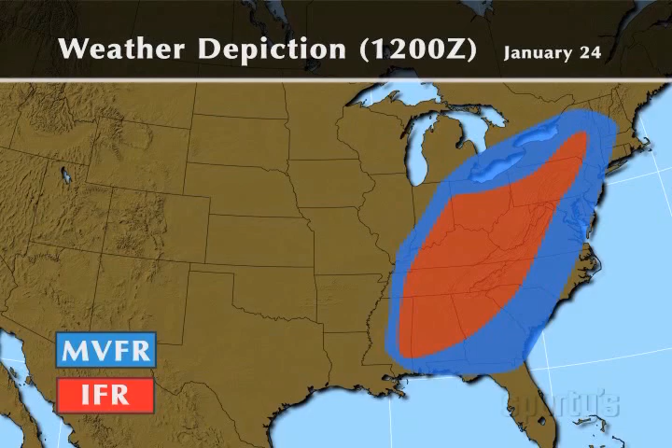Assuming that you will remain at a safe altitude, determine if there are VFR conditions nearby. ATC can help out if you don't recall from your planning. If you can safely proceed to a suitable nearby airport and execute a visual approach, this is often best.

If VFR conditions aren't present, it's time to analyze your best instrument approach options. Ideally, you would like to find a suitable airport with an approach that is well above minimums and that will allow a straight-in landing. An approach to minimums on one engine, which will require circling to land on a short runway, stacks the cards against a successful outcome.

If you are adequately equipped, a precision or LPV approach to a straight-in landing on a long runway with conditions well above minimums would weigh things in your favor.

If the single-engine ceiling is below ground level and IFR conditions are prevalent, you have an urgent emergency situation with limited options. This emergency would be similar to an engine failure under IFR in a single-engine airplane. You might have the advantages of traveling a longer distance and redundant systems on the operating engine. Discussion of options that could lead to a successful outcome in this situation is beyond the scope of this program.

The rest of our discussion will assume that a safe altitude can be maintained and that we must fly an instrument approach. An instrument approach with only one engine can be a complicated process. It requires good instrument skills along with good skills as a multi-engine pilot. Judgment must be used to determine if and when to change the configuration of the aircraft. Power settings that work with two engines won't work with one.

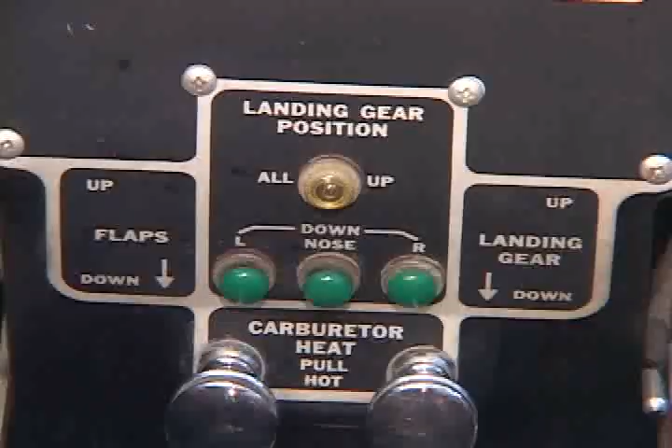Your basic setup for a non-precision approach will be the same on one engine as with two. Complete a before-landing checklist prior to reaching the final approach fix, but do not lower the gear or flaps. You may be required to fly the approach at VYSE if that's what's necessary to maintain altitude. If you can fly at your normal approach airspeed and still maintain altitude, this will give you a safety buffer. Leveling off from any descents will require additional altitude due to your limited power.

Plan a sufficient lead. Upon acquiring the runway environment and being in a position to land, ensure that the landing gear is locked down. Reduce power and begin a descent to the runway. Establish VREF when the landing is assured and complete the single-engine landing.

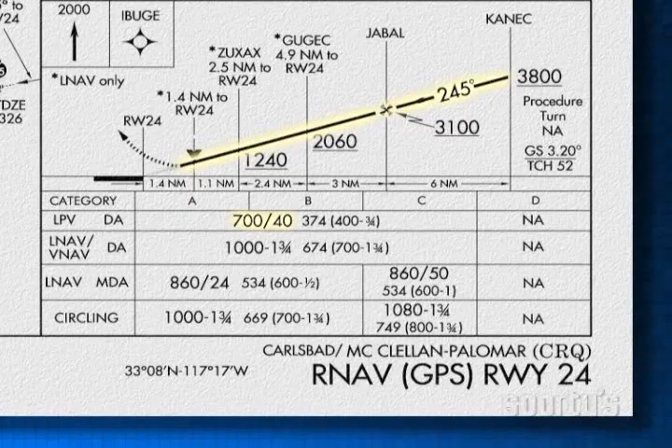A precision or LPV approach on one engine provides a constant descent angle upon glide slope intercept. This fact, along with lower altitude minima, make these approaches best for an approach with an inoperative engine. As with two engines, complete the before landing checklist prior to glide slope intercept. Defer the landing gear and flaps until an appropriate time. Decide the appropriate time based on the aircraft performance and the conditions of the day.

Realize that you may be committing yourself to landing once the gear is down. Also, realize that you may destabilize your once-stable approach if you wait too long to lower the gear.

If the approach is unsuccessful, a missed approach on one engine can be a very hazardous proposition. You face the same concerns as a go-around with the addition of the instrument environment. You also need to be concerned about any climb gradient requirements for the runway. Like the single-engine go-around, the earlier and higher you make the decision for the missed approach, the better the chances for a positive outcome. Better still, find an approach where a missed approach is unlikely.

As you can see, an engine failure in the instrument environment will demand a great deal from your skills. If you plan to fly a multi-engine airplane on instruments, you do need to keep these skills honed. Even the pros require regular practice to stay safe in this environment.

Now that you have the multi-engine rating, what's next? First and foremost, you need to maintain your skills. Develop a plan to regularly visit with your favorite multi-engine instructor and stay in practice. This is important even if you are flying a twin on a regular basis. The skills you need to keep sharp are the emergency skills you hope you won't need.